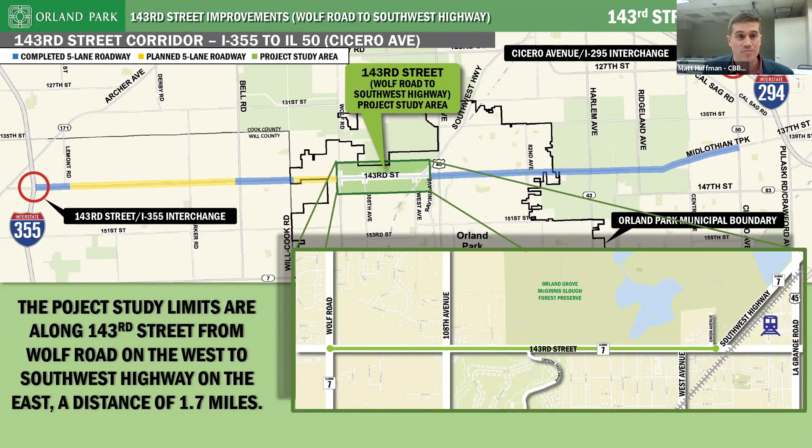Moving on to the project development process. The engineering process does take some time to get through. We are currently in phase 1, which is preliminary engineering and environmental studies, the first step of the process. At this point we investigate the transportation needs and solutions for the project. The phase 1 study is anticipated to be completed in spring 2021.

The village will be advancing the project into phase 2 engineering in mid-2021. That phase will take about 18 months to reach substantial completion of the design. Phase 2 engineering consists of contract plan preparation and will be funded with a combination of federal, state, and local funds. At this time, the village has not identified funding for land acquisition, which is targeted to begin in 2023 or 2024 and typically takes about 18 months.

From now until then, the village will be actively pursuing federal funding with IDOT to help pay for land acquisition. Funding for construction has also not been identified. Once funding is identified for construction, that will begin following completion of land acquisition, and construction will likely be multi-year, about 24 months in duration.

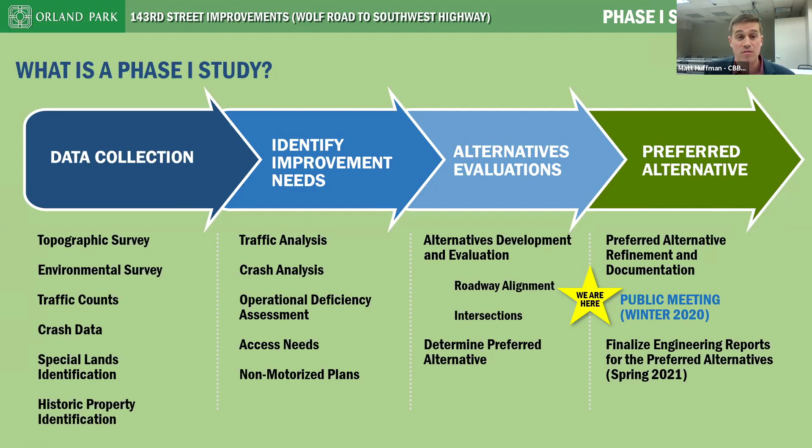Moving into station two, which is the project information. The first exhibit we're going to go through here is traffic information. This is one of the initial steps of the project development process: identifying the transportation issues and needs. This exhibit shows several pieces of information.

Roadway jurisdiction is indicated by the label below the street name. For example, 143rd Street here shows IDOT, so it's under IDOT jurisdiction, as is the south leg of Wolf Road. 108th Avenue, south of 143rd Street, is Cook County jurisdiction. The Village of Orland Park has jurisdiction of all local streets, such as West Avenue, Beacon, and 108th north of 143rd Street.

But for the majority of this project, 143rd Street is under IDOT jurisdiction, marked as Illinois Route 7. The average daily traffic, shown for existing conditions and future year 2040 conditions, is also provided—these are the numbers in the boxes, with the top box showing existing traffic and the bottom box showing projected traffic. The traffic projections are obtained from the Chicago Metropolitan Agency for Planning, the Chicago area planning agency, for the design year, which is currently 2040.

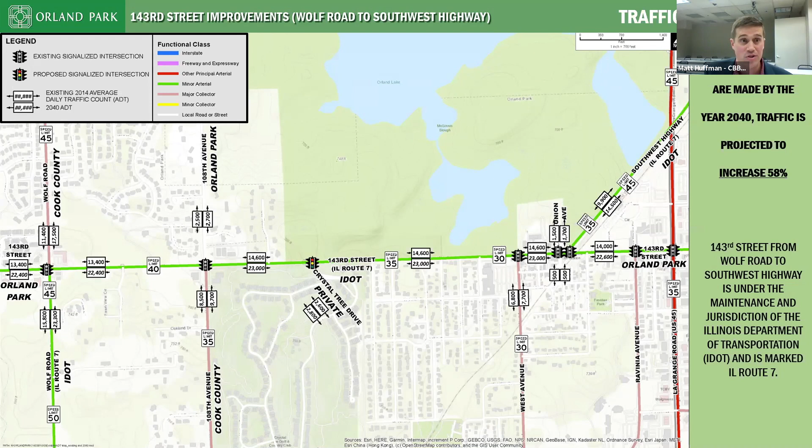The big main point of this exhibit is that the existing traffic, the average daily traffic, which is the amount of cars that travel the road in one day on average, is about 14,600 vehicles. By the year 2040, we're anticipating that to increase to 23,000 vehicles per day, which is an increase of about 58%. You can spend more time looking at this exhibit and the numbers and what the increases are projected to be. Moving on to the next exhibit, we're going to talk about capacity.

This is really addressing congestion, right? The ability to move cars through the corridor and people. So there's a lot of information on this exhibit, and what you see here in the bubble outs, we're evaluating each major intersection, and we're evaluating them for 3 conditions.

One is for existing traffic, so how does the intersection perform today? Then we look at, well, what if we factor in the projected traffic and we make no improvements? So basically do nothing, but the traffic continues to grow. What does that look like? How does the intersection perform? And then the last scenario we look at is, what does the improvement do to the intersection with future traffic? So projected traffic with the proposed improvements. Those are the 3 numbers that you can see here.

The results of the analysis for each main intersection is shown in the bubble outs. And to provide some information on what capacity is, we measure it by what we call level of service. That's essentially assigning a letter grade rating, A being best through F being worst, that represents the average amount of delay experienced at the intersection.

A level of service C, which is in the middle here, is usually what we aim for when we design a project. So we don't aim for an A, we aim for designing a project to obtain a level of service of a C.

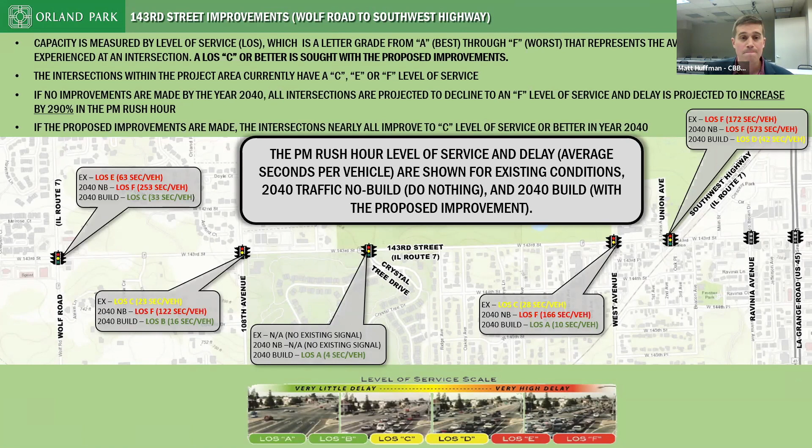Moving on, the next thing we take a look at is crash analysis. We want to understand where the injury crashes are occurring, so we obtain data from the Illinois Department of Transportation on all the crashes that occur. We look at a 5-year window, the last 5 years, to identify crash patterns and formulate countermeasures to address any safety issues. Overall, there are 490 crashes from 2014 to 2018, which resulted in 94 injuries, or 19% of the total crashes. There were also no fatalities within this project corridor.

The predominant crash type is rear end, which composes about 65% of the total crashes. Turning crashes, which happen if you're making a left-hand turn and collide with an oncoming vehicle, consist of about 15% of the total crashes. Fixed object crashes, meaning if you crash into a power pole, a light pole, or a tree or something of that nature, consist of about 7% of the crashes. The highest representation, the rear end crash, is commonly associated with congestion, specifically around signalized intersections, and also the lack of turn lanes along the corridor.

The recommended countermeasures from the crash analysis are to improve the pavement and drainage conditions, add through lanes and median or center turn lane, add auxiliary turn lanes at intersections, so left or right turn lanes, and improve sight distance along the project.

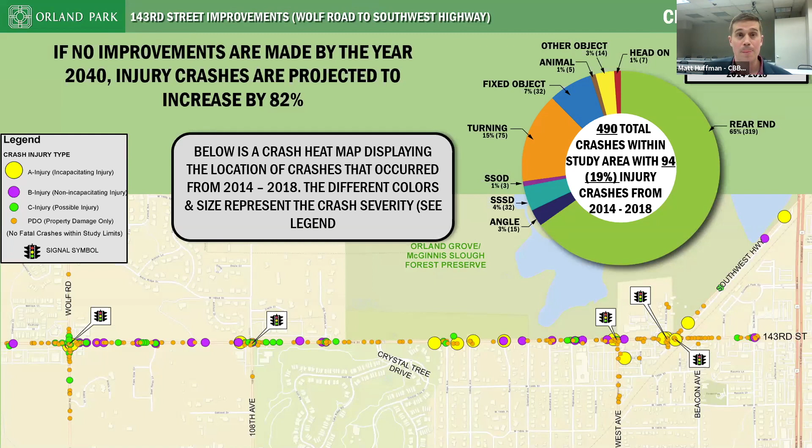Looking at the existing conditions, this shown here is an exhibit of the existing conditions. There's a ton of information on here which we won't go through all right now. Simply to explain the exhibit, along the bottom you'll see diagrams of the existing intersection configurations for each of the 5 main intersections: Wolf Road, 108th Avenue, Crystal Tree, West Avenue, and then Union Avenue and Southwest Highway.

Above that are 2 typical sections, showing the existing roadway at those 2 points, which indicate that there's 1 lane in each direction along 143rd Street for a portion of the corridor, and also as we know, as we go east, there's a sidewalk. So this is just showing the existing conditions in a simple way.

Along the top is an aerial view of the project corridor showing locations of signalized intersections, floodplain in blue, which you can see here, and wetlands in darker blue, which are a little bit closer to the roadway, as you can see over there.

Public lands in green - we know we have the forest preserve over here. Historic properties in purple - you can see some purple properties over here in the Old Orland area, the Old Orland Historic District. And we also have some line work here to show existing sidewalks.

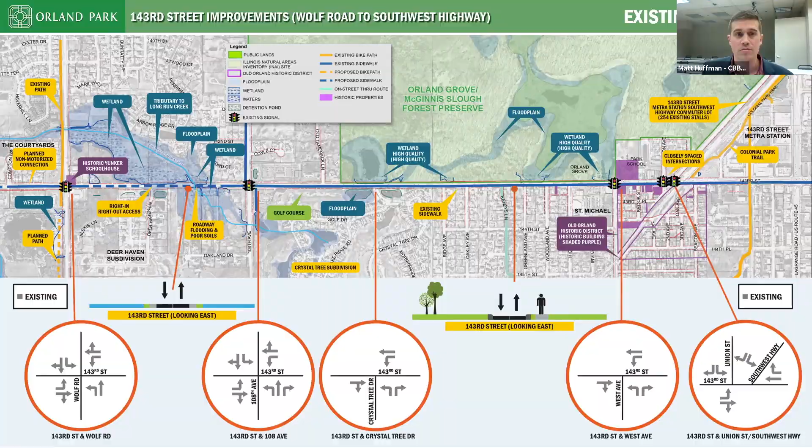Now moving on to the proposed improvement information. Again, you'll see the same exhibit layout as we had before, but now focusing on the proposed improvements. As with the prior exhibit, there's a lot of information on here.

Along the bottom, you will see a diagram again of the existing intersections. This time, we're adding in the proposed lanes that are being added at the intersections in orange. So for example, at Wolf Road, you can see we're adding a second through lane in each direction in the north-south direction - you'll see the second orange arrow, which means we're adding another lane.

So that is along the bottom - you can see real quickly the lanes that are being added at the intersections. The gray indicates the existing lanes that are going to remain.

Some key items to point out starting at Wolf Road: a second northbound and southbound through lane in each direction, shown by the orange arrows. Right turn lanes are also being added on the north, south, and west legs. The takeaway is we're making a substantial improvement at the Wolf Road intersection.

We are adding a new signal at Crystal Tree, where there isn't one currently. Also, at the Union Avenue and Southwest Highway intersections, we will be consolidating those two intersections into one signal, simplifying operations.

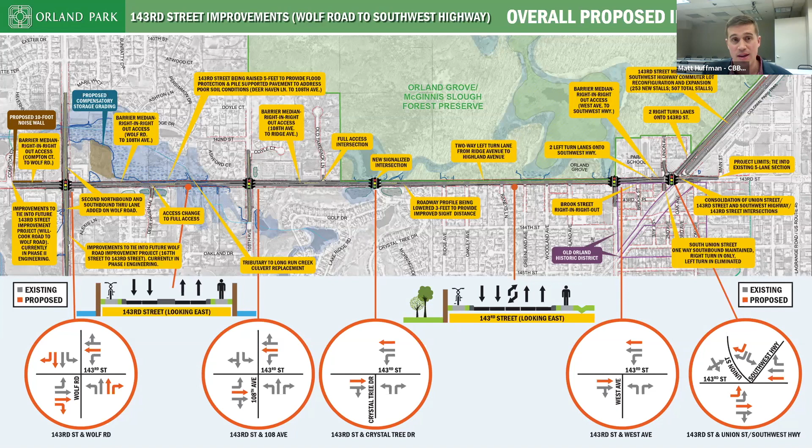So overall, that's a summary of the main takeaways of the proposed improvement for the project.

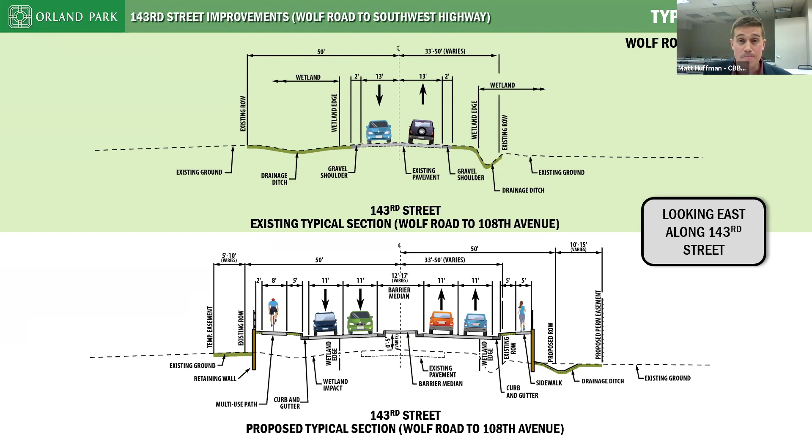And we'll talk about land acquisition and property acquisition in a little bit.

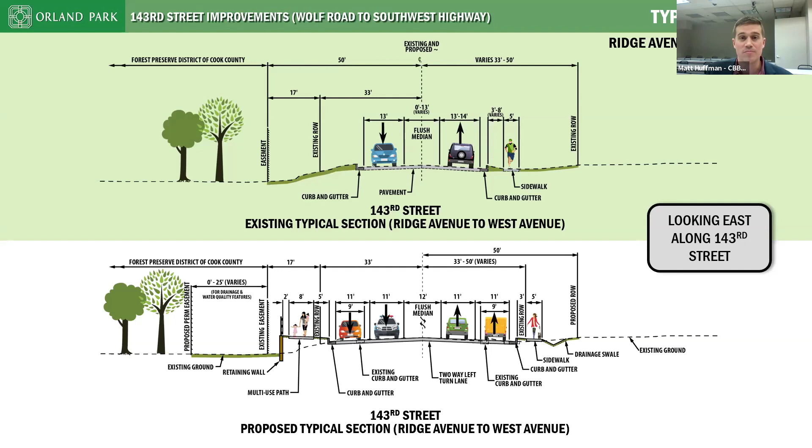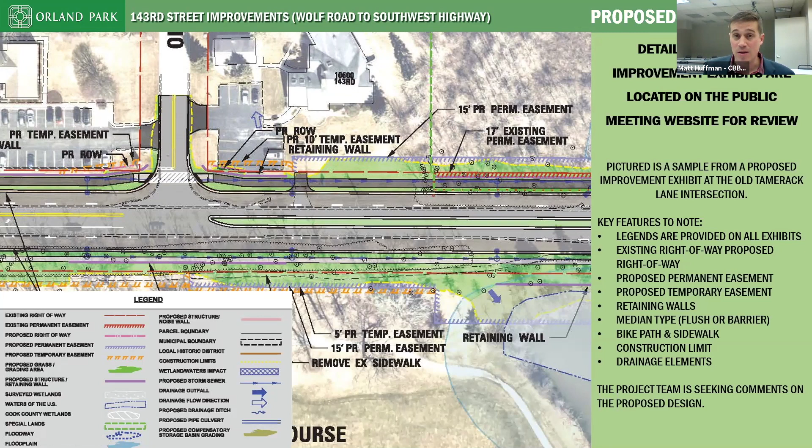We're not going through the entire project corridor right now, we'd be here for another 3 hours. But we want people to go to the project website and look at these proposed detailed exhibits, see if you have questions or concerns about the design. We want to hear that. Those are the things we really want to know at this stage, towards the end of phase one, where we're still making design changes and tweaks. That's really one of the main focuses of our public engagement activity tonight.

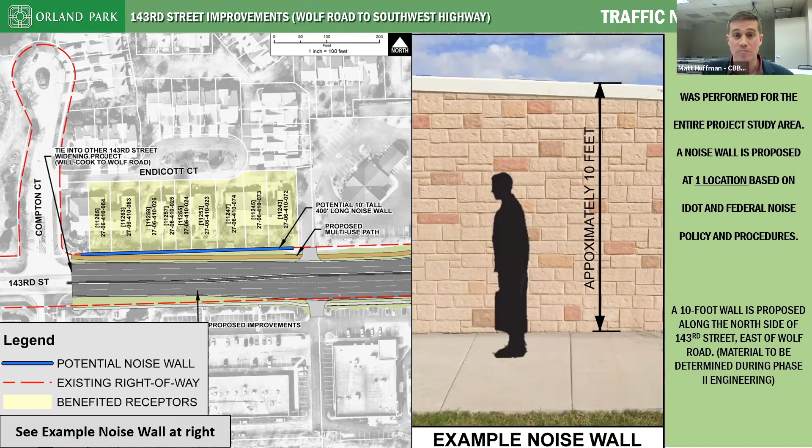Moving on to the next station, land acquisition. We want to talk about the land acquisition process, what that means, as well as proposed property acquisition and proposed use from the Forest Preserve District and the historic properties. Those two are afforded certain protections under federal and state regulations.

Permanent easements are where folks still own the underlying property, but someone has permanent access to it during and after construction—for the village or IDOT, that would be for drainage elements or structures. Then there are temporary easements, where underlying ownership is retained by the property owner, but access is temporarily allowed during construction for items such as grading, driveway construction and replacement, or other minor improvements. Overall, we have 33 retaining walls proposed throughout the project limits to try and minimize property acquisition.

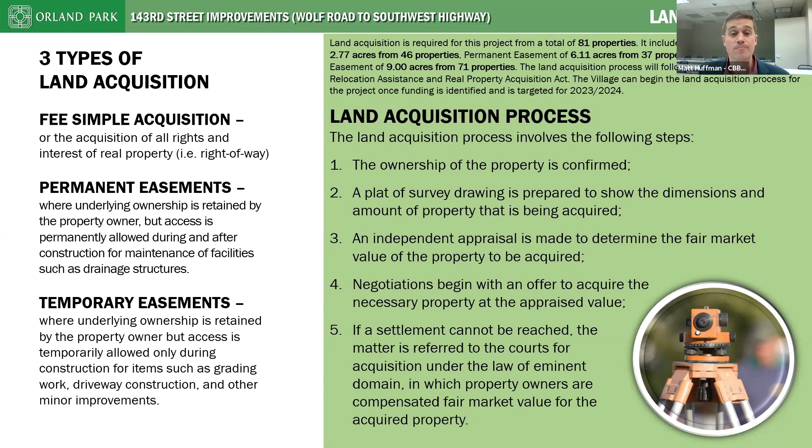As part of the proposed improvement, we have proposed use of the Forest Preserve District of Cook County's McGinnis Slough. With that, we must obtain federal approval, afforded protections under Section 4(f) of the Department of Transportation Act of 1966. The Village of Orland Park is seeking public comments on the Forest Preserve property at 7 locations, for a total of 0.51 acres of permanent easements and 0.15 acres of temporary easements. This exhibit provides detail about the location and impacts of the easements. Here is an overall exhibit showing that.

We have a link on the website with detailed information and documentation about the proposed use from the Forest Preserve District, including more detailed zoomed-in exhibits. A key thing to understand is that in 2011, the village obtained a 17-foot easement from the Forest Preserve along the north side for the future widening of 143rd Street, and we are using every bit of that 17 feet that we can for the project. These are additional easements on top of the 17-foot one the village already obtained. We intend to seek a de minimis finding from the Federal Highway Administration for this proposed use, meaning we don't adversely affect the features, attributes, and activities qualifying this property under protection of the US DOT Act Section 4(f). We're seeking comments from the public on this proposed use.

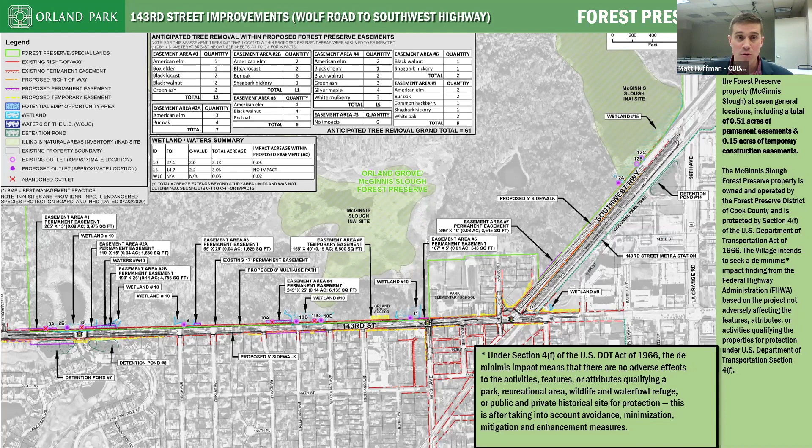Similarly, we need to obtain a similar approval for historic properties. We have a variety of historic properties, 7 of which we need proposed acquisition from, the majority in the Old Orland Historic District. Again, they are afforded federal protections under Section 106 of the National Historic Preservation Act and Section 4(f) of the US DOT Act we just talked about. We have a total of 0.17 acres of permanent easements or right-of-way and 0.05 acres of temporary construction easements from historic properties. This is a summary exhibit showing those locations.

They are highlighted in blue. You'll see one over here at the Wolf Road intersection, the Yunker Schoolhouse. There's one residential property near Woodland Avenue, I believe. And then we have the remaining 4 over here in the Old Orland Historic District. Again, more detailed information on the proposed use of the historic properties is located on the project website.

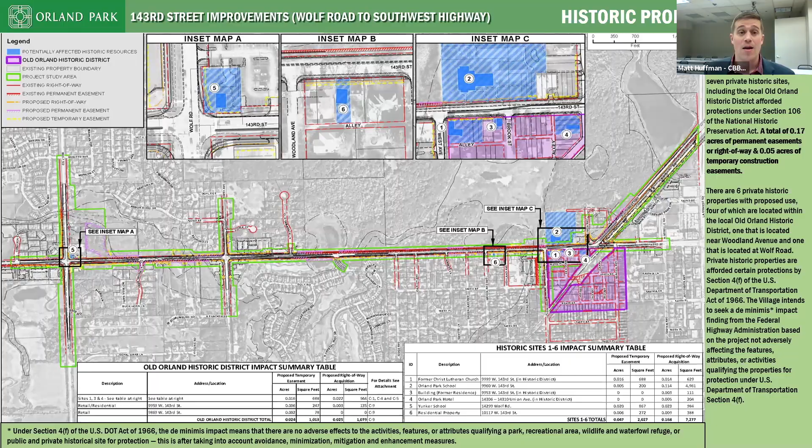I am done talking, so I'm sorry that took a little bit longer than I anticipated. With this, we're going to transition into the comment and question submittal.

Before I jump into that, this slide explains how people can submit comments during the public meeting comment period. We're looking for comments from folks by January 11th to be included in the public meeting record. As I mentioned before, we're always taking questions and comments, so after January 11th, if there are still questions, we'll answer those at any time throughout the project. But right now, we're seeking comments specific to the proposed improvement in this public meeting. You can submit comments via the project website, submit a comment form downloadable on the website—we also did about 500 mailings to folks living along and around the corridor—mail it in, email it in, with instructions located there, or make comments tonight at the meeting, either verbally or in writing.